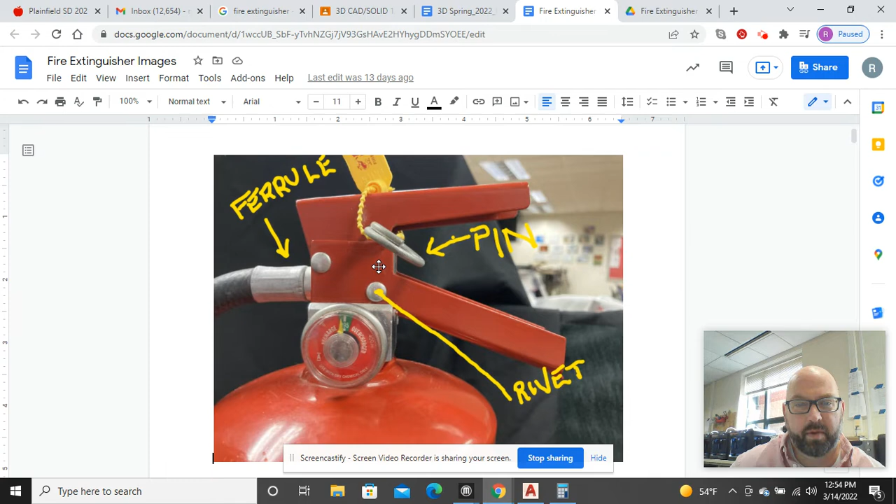There's an error on the dimensions of this that you could only get off of the video that I'm going to have to go ahead and replace on the drawing itself or on the hand sketch. And if you look, the top handle pivots within the sides. Let's call these ears of the bottom handle on the right and left side of the valve. There's the bottom handle's attachment. So you can see that this top handle pivots between there and there.

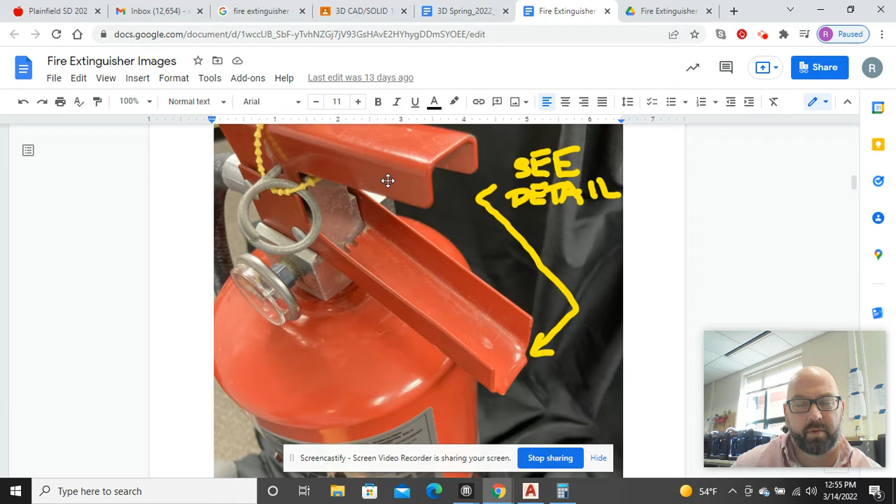But in this picture, it's very clear that there's a groove right in here and in here in the valve that this handle sits down between. So basically, where my cursor is, it's the inside distance that you have to work off of in here, whereas on this one, we worked off of the outside distance. And that distance was unknown on my drawing.

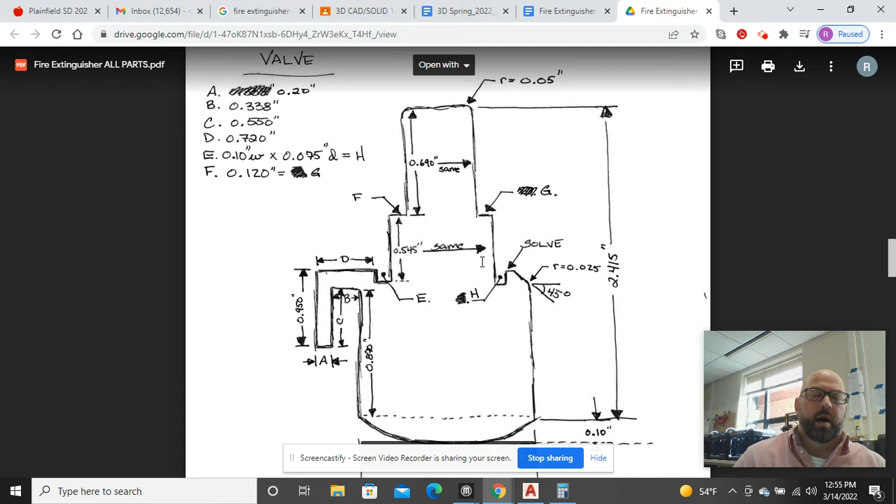I never defined it because what I had done was gone through a series of over, down, over, up, over, down, and then I mirrored the middle of it. I did know that the width of the whole thing was 1.5, but I never did determine that distance from across right here where it says same. I was able to determine it going back to the AutoCAD drawing by taking the valve and going up here

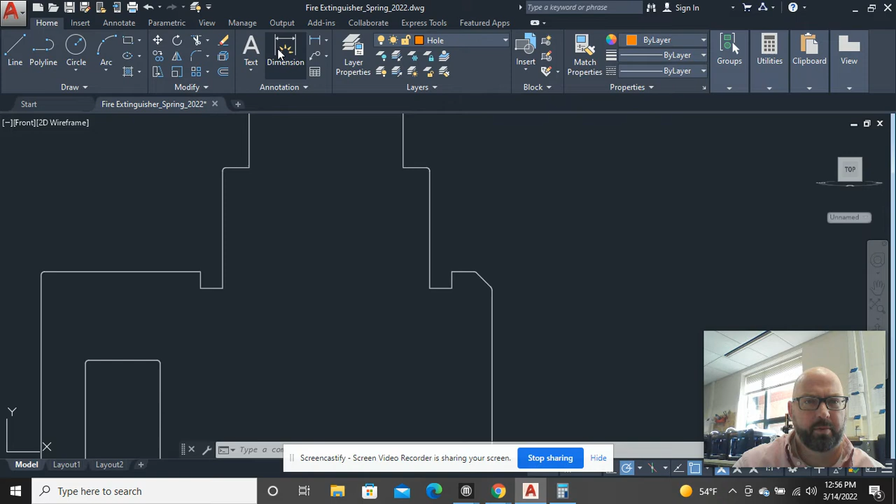to a front view. And the way I determined it was, if this handle sits down in this notch and down in this notch and is pinned right through this section of the valve, then all I need to know is, and sometimes this measure tool does not work that well. I'm in a 2D ribbon right now, but if I measure the distance from here to here, my dimension style is not set up for something this size, but it tells me that that's 1 inch.

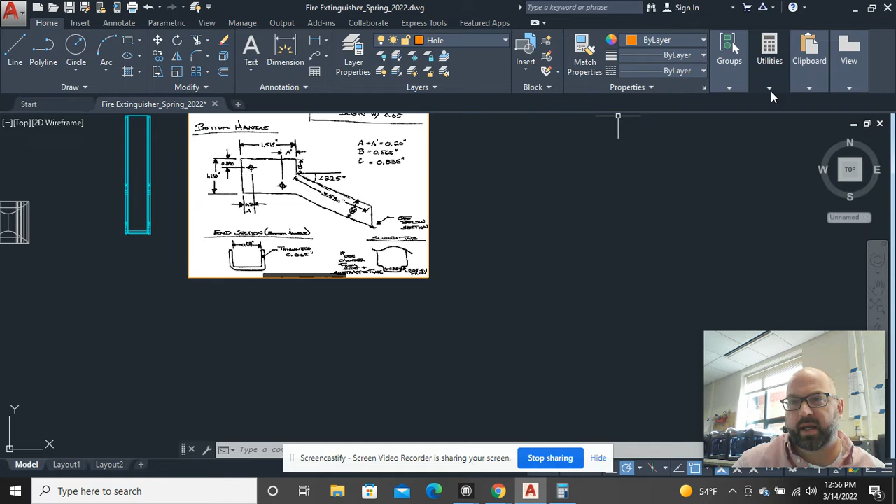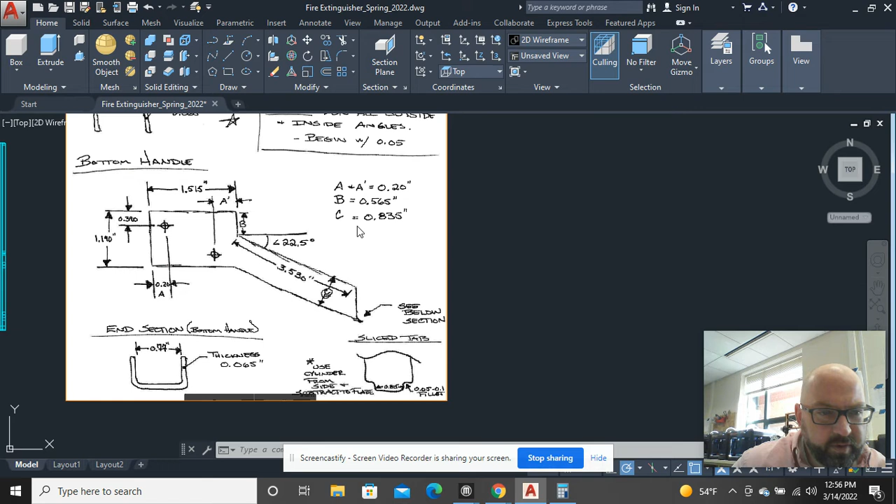Okay. Now I'm at a point where I can start my drawing. I'm going to switch back to a 3D modeling ribbon. And I think I do already have a bottom handle layer set up. And I do, right there, bottom handle. So the approach in drawing this is going to be, I'm going to start in the bottom left area, down here in this corner, basically. And I'm going to go up and down and around.

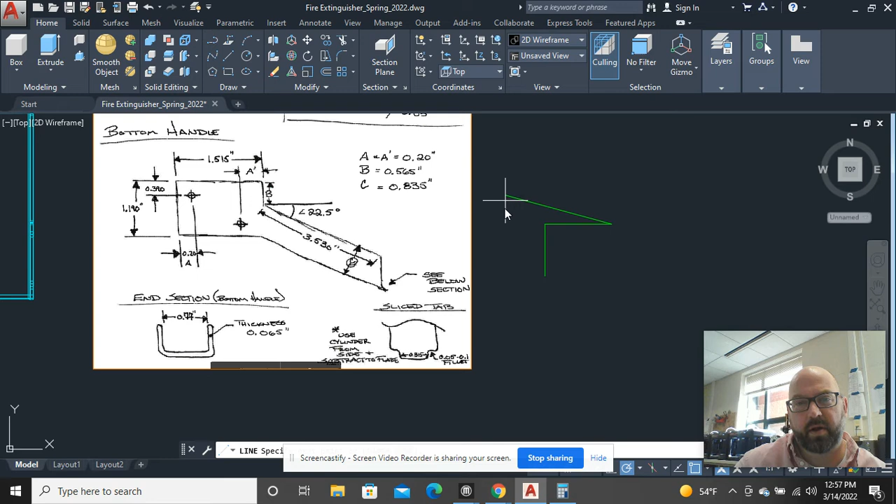So in this case, I'm going to draw a line, and it's going to go up 1.190. And then it's going to come over 1.515. And then you can see up here on this side, there's some dimensions or measurements. And that dimension would be, let's see, is that B? B says it's 0.565. So I'll come down 0.565. Now I'm at a point where I have a distance, and it's defined. It's 3.530, but it's 22.5 degrees down from here, which is 0, or 360.

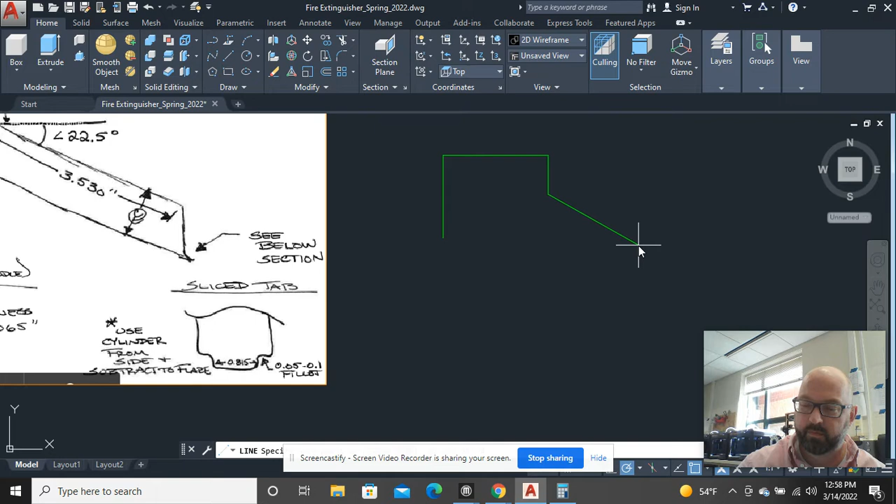So if I take 360 and subtract 22.5 degrees, I can say at 3.530, and then use the angle symbol. And I have to now do the math and say, what's 360 minus 22.5? Well, that would be 337.5. Okay. And then it tells me right here that the thickness of this handle is 0.835. So I'm just going to draw a line down here into space, and I'll offset this 0.835.

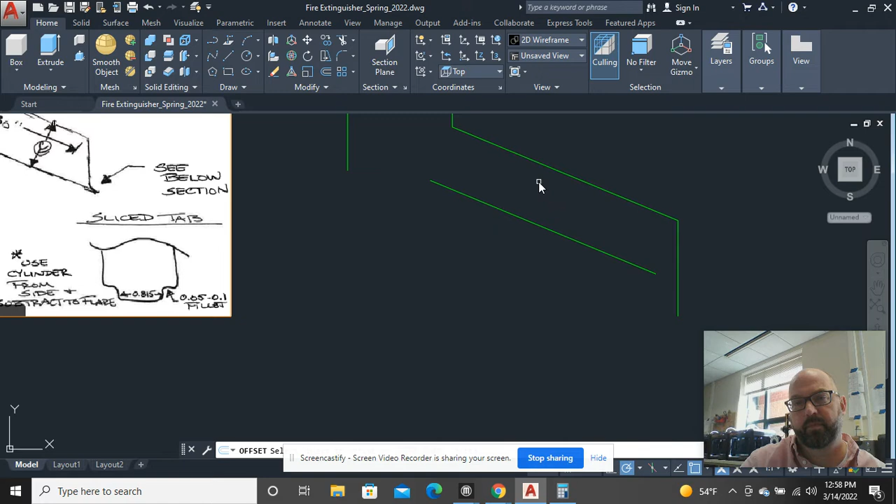Okay. This part can now be extended. And this line, which was at an unknown distance, can be drawn over this way. And this now can also be extended like so. For some reason, I feel like in the actual fire extinguisher itself, this intersection actually kind of belongs over here, like so.

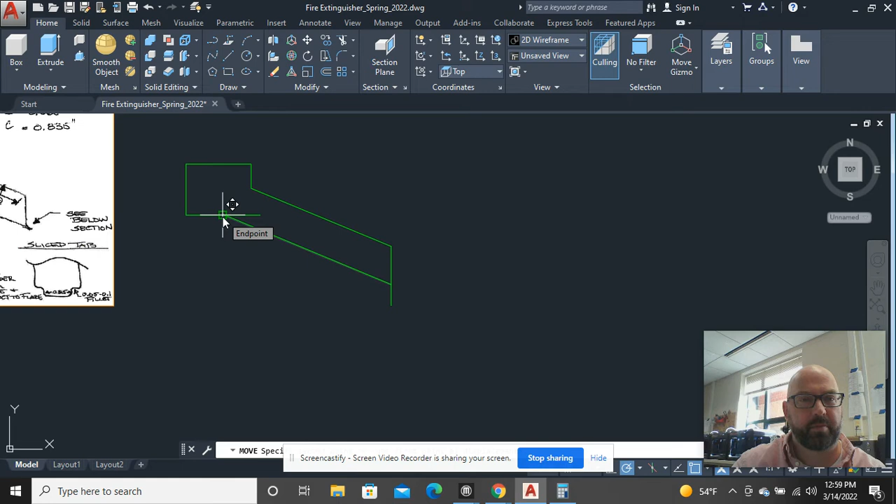I tell students it really doesn't matter, whichever way you want to do it is up to you. But if you look here, this rivet right here, the hole that's going to go here would kind of miss over here. So what I would do is just extend this down and then move this over.

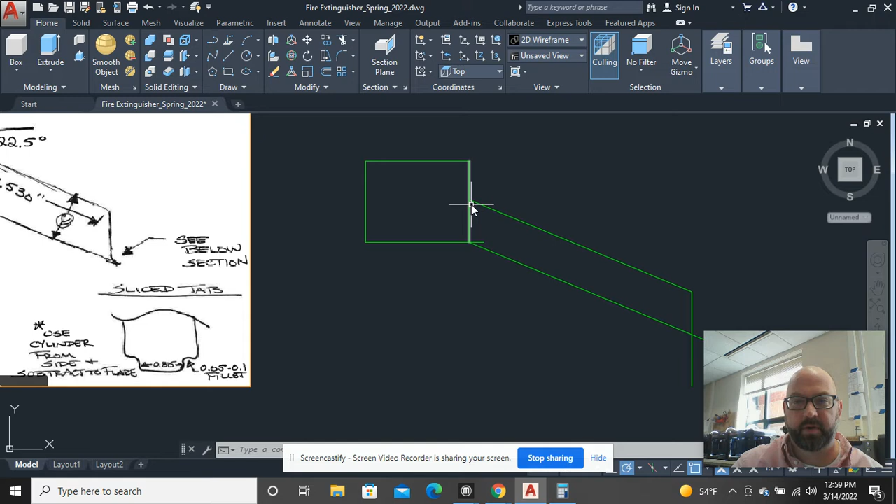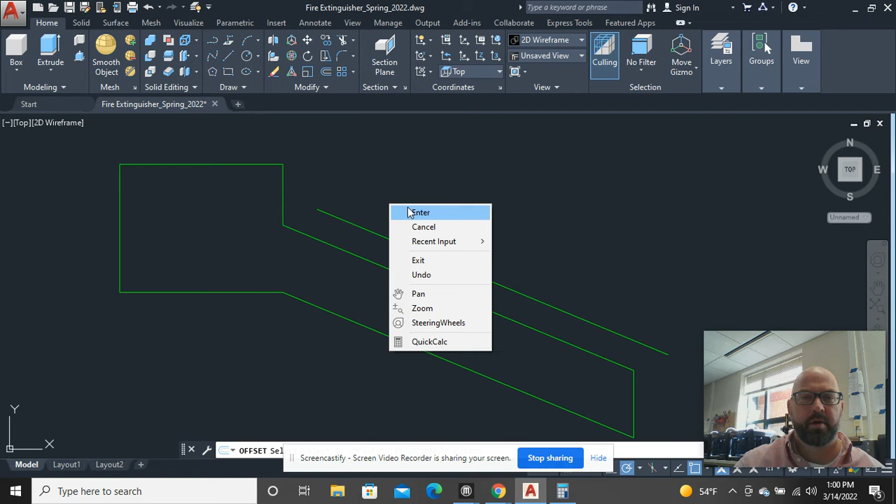And this is one of those things where we're looking for the photorealism out of this, and we want the drawing to be as close as possible, but perfect is not necessarily something that we need to achieve. The other thing that we could do is offset this 0.835 upward from the bottom, but then you can see that it's going to not leave as much space up here.

The other thing you could do is just arbitrarily do this. And extend it like so, and extend it like so. So anything, sky's the limit as far as that goes.

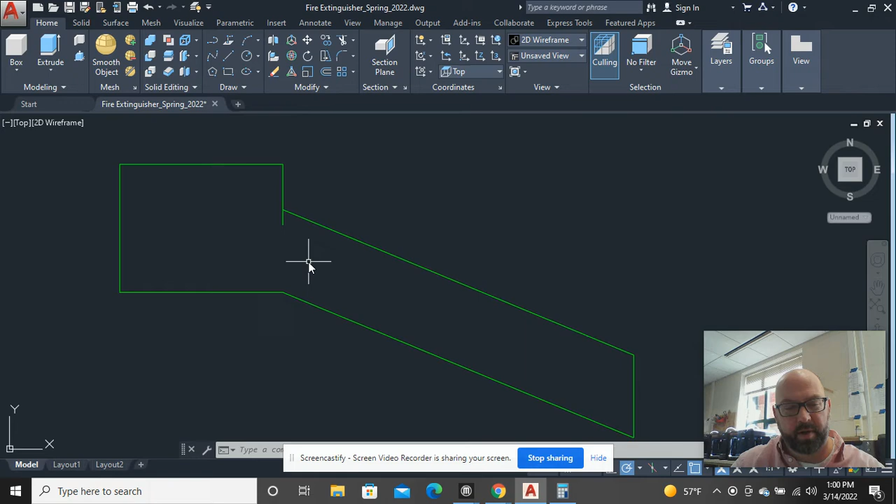Okay. At this point, there are a couple of other things that we've got to focus on. We do need to have a cookie cutter that's going to go all the way through this, but we're going to need two, because we're going to need one that's going to go in this direction through the top portion, and we're going to need another one that's going to go in this direction through the bottom portion.

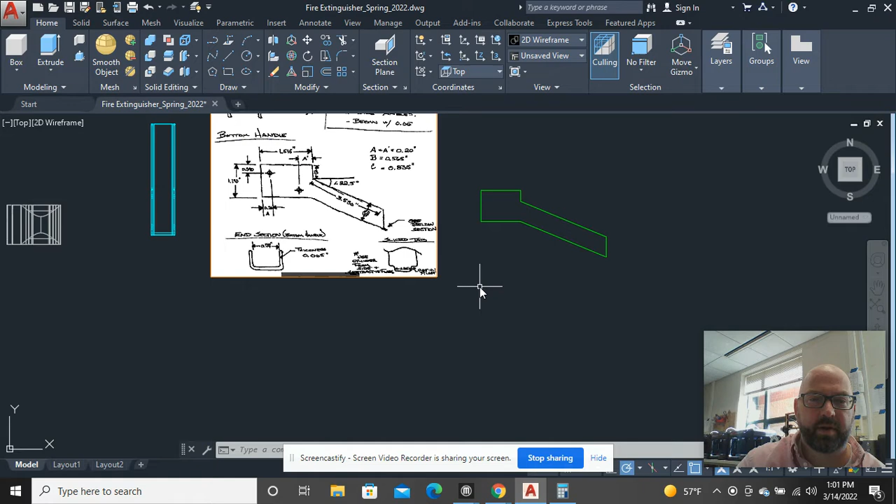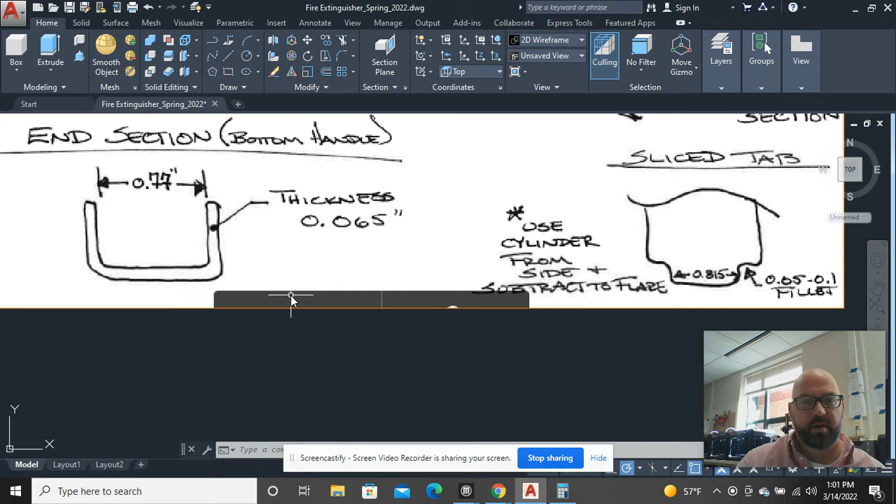So in this case, and I said this is an incorrect dimension, we know that between the two sides we need 1 full inch. So I've got to do a little math again. The thickness is 0.065. So I have to say, okay, 1 full inch plus 0.065 plus 0.065 is equal to 1.13. So in this case, I'm going to draw a rectangle,

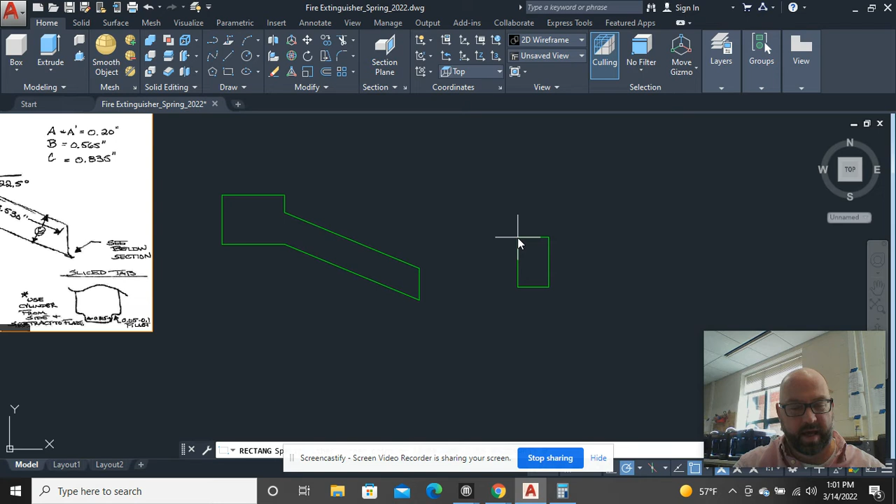oops, I did that math wrong. 1 full inch is equal to 1.13. So I'll say at 1.13, comma, and this is where I can determine the height. And as long as I go over the maximum height of the object at any point, then I am just fine. So I'll say 2.

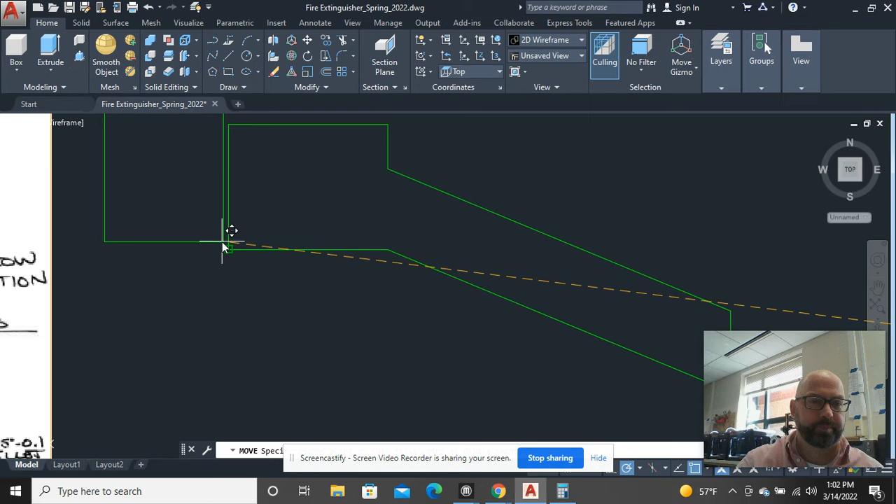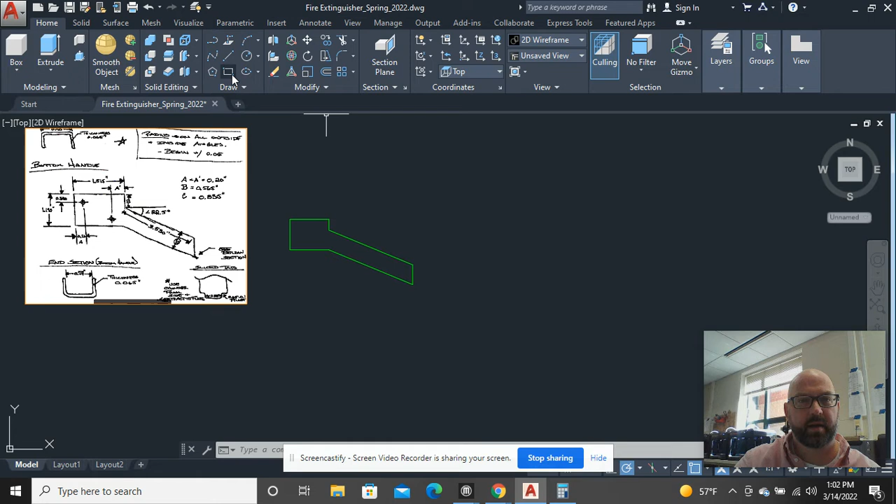Okay. Now, why did it have to be over that? It just had to be that much right there. And I just realized I screwed something up. The extrusion is the thing that's 1.13. The cookie cutter that I should be making is 1 inch. So, whoops on that. So the extrusion is at 1, comma, I'll just make it 2.5.

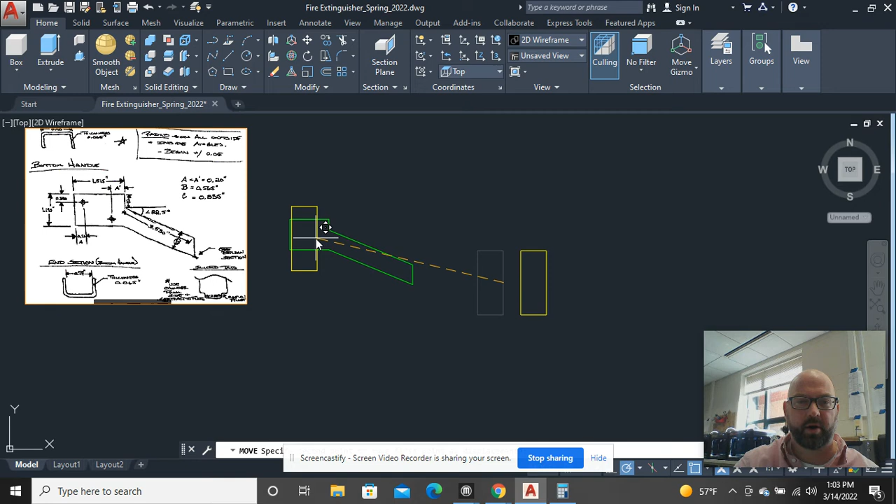Two of these will work completely fine, but one of them is going to need a fillet at the bottom because there will be some thickness. So this part I can run as my cookie cutter that's going to go through here. The other one is going to be my cookie cutter that's going to travel along the handle at that diagonal.

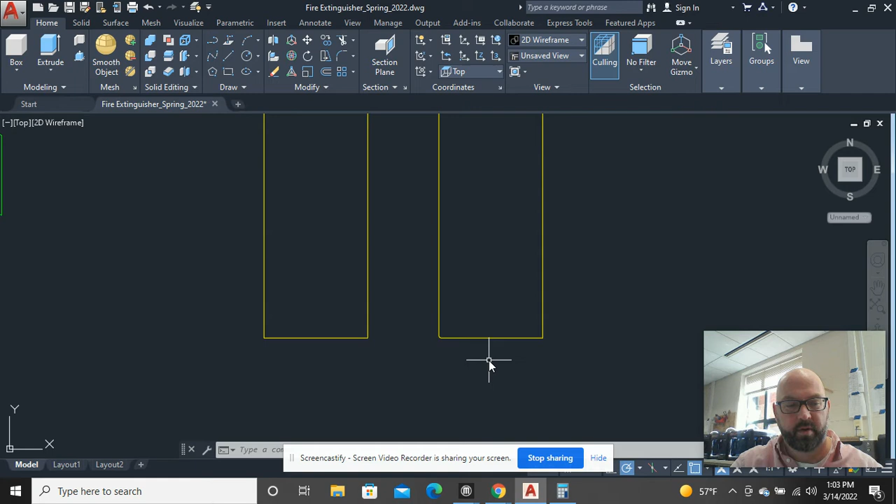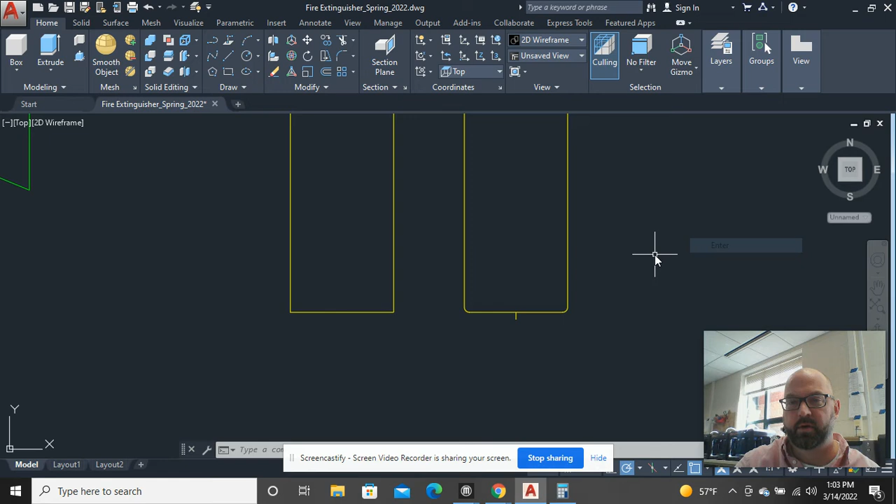So in this case, I want to do that fillet radius of 0.025, just like I did on the last one, and select that. I might actually go bigger than that, 0.05. There we go. That looks good. And 0.05. And just like I did on the last one too, I'm also going to need a little stick. That's the same, so that's 0.065. That's the thickness of the handle. And I'll also need one right here for the thickness of the handle material.

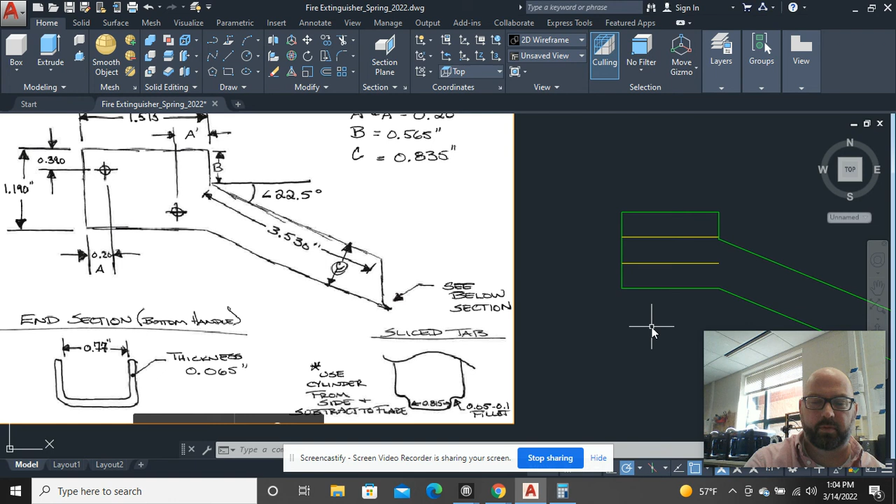Okay. It'd be time now to go back to the drawing to look at where these holes are located. And it tells me that the hole offsets are 0.20 in from the intersection and then 0.390 down from the top and bottom. So if I offset 0.390 from the bottom and from the top, those would be my hole locations vertically. I'm going to put these on a construction layer. And then if I offset 0.20 in from here and in from here, those would be my horizontal locations.

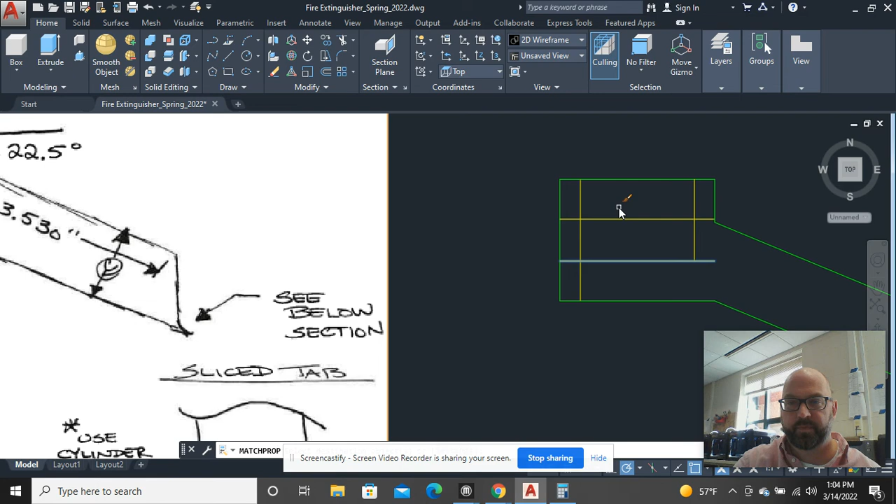And I'm going to have a hole right here, and I'm going to have a hole right here. So this one didn't quite make it. So this and this again are just for locations. So now I'll go to hole. These holes had a diameter of 0.125, otherwise known as 1/8 of an inch. So I'll copy that. Come over here. I can get rid of all these lines that I used for alignment.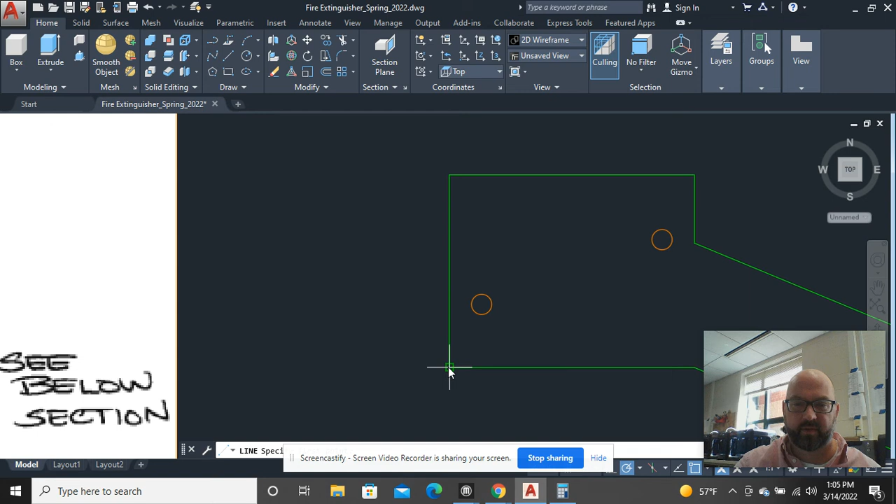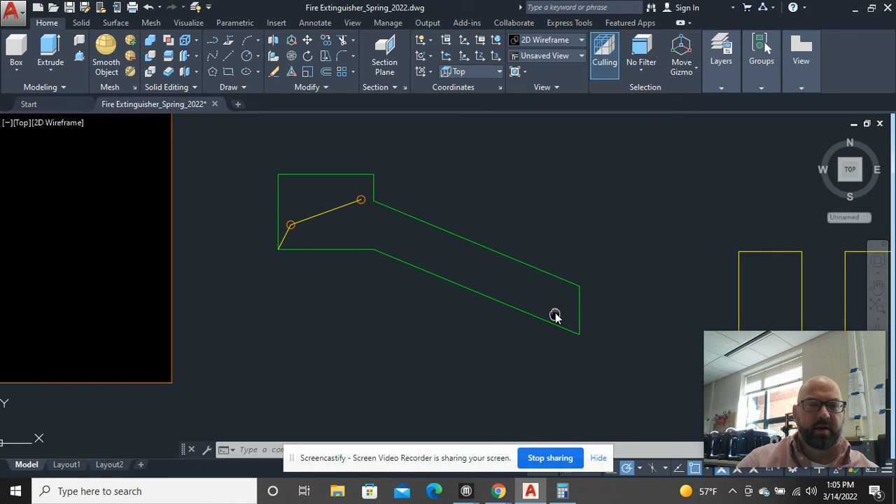And I can do just the exact same thing as I did before, which is to draw a construction line from here to here to here. And again, like before when I messed with that filleting earlier on, I'm not going to mess with it too much. I'm going to come back in the next video and I'm going to deal with this tab slicing issue.

And before I do that, though, I can move my template right over here. So I'll deal with this little tab slicing bit. Part of it takes place in 2 dimensions and the other part in 3.